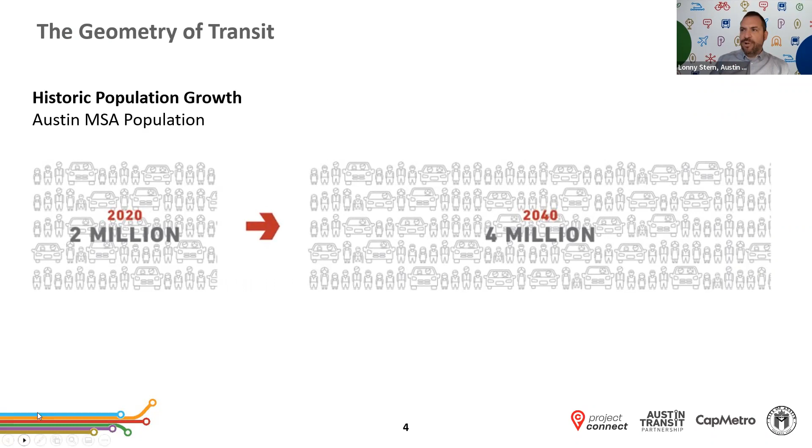First, none of this is a surprise, I'm sure, at this point, but the region is growing. We're doubling in size, and by 2040 there'll be twice as many of us. Unfortunately, the roads will not be twice as wide in 2040, so we need to figure out how to move more people through the same amount of space.

So what we're trying to do is encourage people to choose a bus, choose a bike, a train ride, a pickup ride, or to walk when they can. It's not an all or nothing thing, but if you're commuting to and from the office 5 days a week and 1 day a week is your transit day, that's a 20% reduction in your contribution to the traffic. Or if you're thinking, that's cool, but I don't have a bus, I don't have a train, I'm not going to ride my bike to work — even just carpooling is a reduction. If you carpool once a week, that's a 10% reduction in your contribution to the traffic. And certainly van pooling is another option as well.

So we look to partners like Movability to help people choose those choices. But at the same time, we still need to offer these opportunities so that you have those choices. And Project Connect is a piece of that.

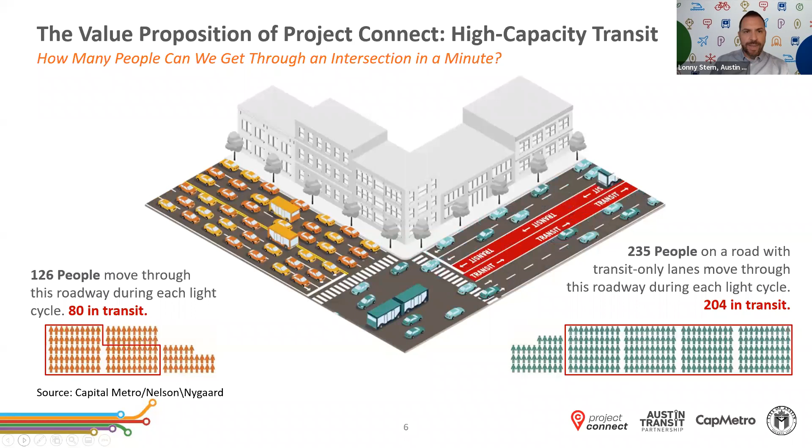Now, in order to do that, we worked on a plan called Project Connect, and I'll give you just a little bit of an overview of the players and the timeline and what that plan is like, and then we'll take a deeper dive into the services themselves.

So first, this builds off of the Austin Strategic Mobility Plan, also known as the ASMP, and the city approved this. I'm basically noticing that right now 3 out of 4 people drive to work alone, and that was in 2019. So I suspect that a few things have changed since the time that this survey was done.

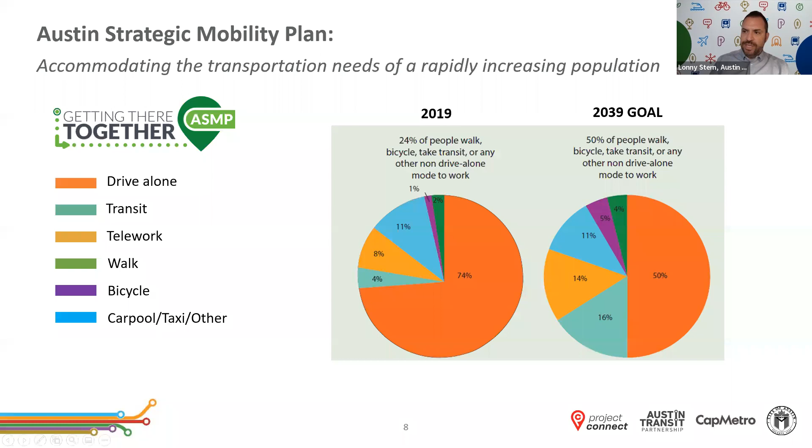We are trying to increase all of the alternative modes like transit, teleworking, walking, biking, or even taking a scooter, taxi, or carpooling. We are trying to make that a 50-50 mode split, so that half of people may still need to drive, but half of the people might be able to take some other mode to get to where they need to go. And to do that, part of it includes an investment in expanding and improving our transit system.

Voters in November of 2020 approved the initial investment for Project Connect. The initial investment are the solid lines on this map versus dotted lines as part of the future extension. So you can see things like, we want to offer Metro Rapid service on Parmer, but that's not part of this initial investment, versus we do plan to provide the new Expo Center line Metro Rapid during this initial investment, in addition to the Blue Line and the Orange Line. And even still, you can see there are future extensions of the Orange Line, and we'll go through that in more detail shortly.

In addition to what is getting a lot of attention, which is the rail lines, the light rail lines in particular, there's also the Green Line, a new commuter service we plan to offer, much like the Red Line is today. It's a freight line that could be running people on it as well.

We also plan to make improvements to our Metro Express service. We plan to add additional park and rides and transit centers. We are greatly expanding our pickup neighborhood circulator service. And again, I can go into more detail, especially in Q&A.

We need to build a new maintenance facility for the light rail system to operate. In addition, we'll be making improvements to things like our fare box, and also investing about $300 million in anti-displacement investments along the light rail corridors.

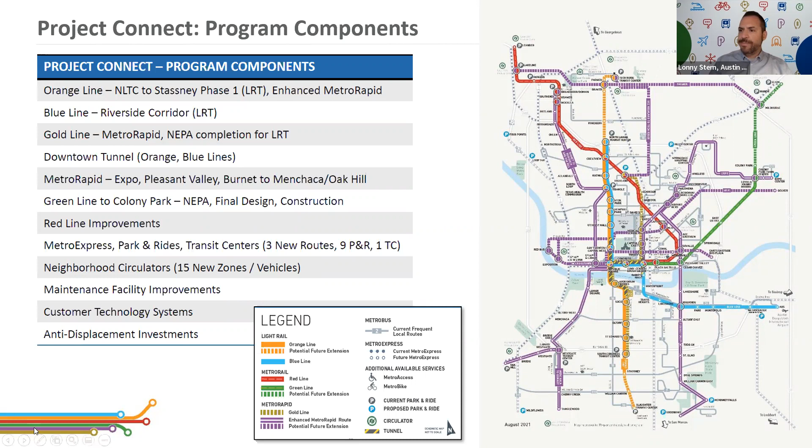And we'll be working with the community on some of the choices involved with that, like should we have a split station or a side-by-side station based on how much space it takes in the street? What do the plantings look like? How is art and the unique character of that neighborhood captured in the canopy? Is this canopy adequate for light, for rain, for information, for electrical charging, for buying a ticket?

And even, you think, oh yes, we need trees, we need shade, but it depends on what corridor you're in and what that tree might block. For example, on South Congress, you might have a really expensive sign on top of your business and feel differently than perhaps the general public about where trees are placed.

So a lot of the work we're doing is currently talking about the track and the station, but in the coming year, in 2023, we'll be talking a lot more about what the street life generally looks like and what the look and feel is of the system. So right now we're talking about track and stations, and in the future we'll be talking more about the actual built environment that goes with it.

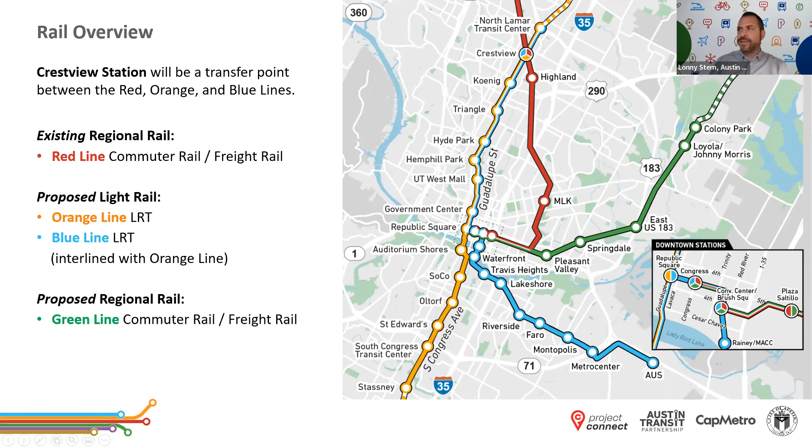In addition, there's the orange line, which in the initial investment will run from 183 down to Stassney. Future extensions would take it to Slaughter and up to Tech Ridge. This is kind of the main trunk line now, and for those who are 801 Metro Rapid riders, it's that same line.

In addition, we have our Metro Rapid service. Metro Rapid are those kind of better bus services where you can enter any door. They tend to have Wi-Fi, the buses are usually larger, and the stations have more real-time arrival info.

We're going to be transitioning to electric buses, so you're going to start seeing these midline chargers in some places around the city. In addition to the Metro Rapids we have today, which is the 801, which basically runs the orange line, there's the 803, and we're planning to make some improvements there. We'll talk about that in a sec.

But these dotted lines you see here, the crosstown, that's a future plan, but currently that's Route 4. We're running 15-minute service there, it just doesn't have the rapid treatment yet. And then over here, the MLK line, that's future service. Again, we have 15-minute service there, but that's Route 18 today.

This will be a new service, again in the future, connecting Tech Ridge to Highland and Parmer, as we talked about. But the ones happening now, the Expo Center line, starts at, you guessed it, the Expo Center with a new park and ride.

It'll go down Loyola up to LBJ High, and we'll very likely have a new park and ride arrangement with AISD at the Delco Center. So for those of you who drive down 183, this could be another opportunity to get on the system.

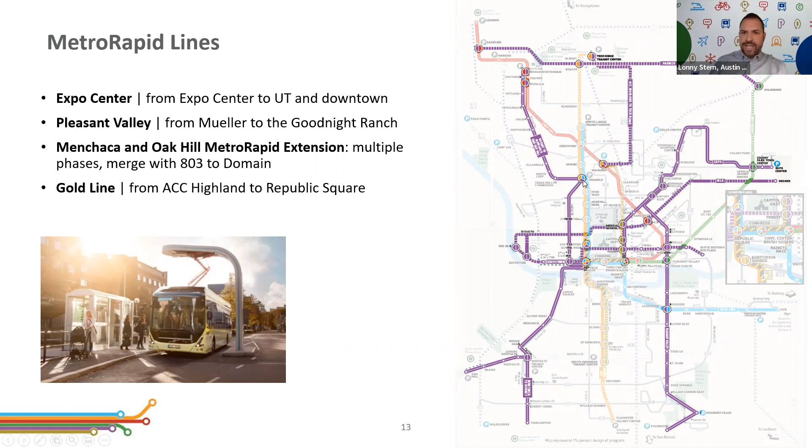When you come down to the triangle, you currently take the 803 down the transit mall, and then it goes out back to the library and down South Lamar. We're considering, when the orange and blue line are running here, that we may bring the 803 onto Lamar, so that you'll have direct service to points on Lamar Boulevard, including Pease Park and the Market District downtown. We're still considering that, and before anything is planned, you'll hear about a public meeting to discuss it further.

Next, I wanted to make sure people know that Project Connect is a program of projects being delivered across a three-party team. When we hosted the election, it was a City of Austin election because they have property taxing authority, and the election was not a bond election.

It was for a permanent property tax. This provides flexibility for the project, so it's not one-time funds, it's ongoing funding into the future. The city not only had that capacity, it's also overseeing right-of-way, permitting, and coordination with utilities, and is overseeing the anti-displacement investments.

We also work with Cap Metro, who operates our transit system. They weigh in on things like service changes, or where the buses might go if this service is put in place, or how you might adjust in the future, or which services would go to this park and ride, or whether a station is in the right location. We work with Cap Metro quite often on planning this project.

The Austin Transit Partnership is the agency that was created through the election. It's a local government corporation. The money raised through the election goes to the transit partnership to build out the projects, and once these projects are built, they become Cap Metro's to operate.

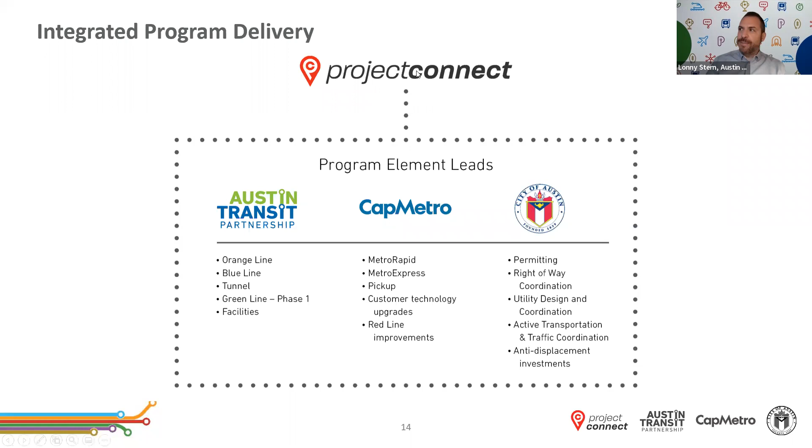It takes all three parties, plus at times TxDOT, the Federal Transit Administration, and CAMPO. There are so many players involved, but again, Project Connect is being delivered primarily across this three-party structure. We have an overall timeline. I think the main thing to take away is that the light rail projects are going to take about a decade.

We're in 2022, so we're about here on this schedule. We're just at final design and procurement, and it'll be about 2024 before we start construction on the line. We could do this faster, but we'd have to have more streets under construction at the same time, so we're planning to phase that construction.

The red line is a continuum—we should be finished with all the red line improvements by 2023, and that's when new service plans may be in place. For Metro Rapid, we're looking at 2023 and 2024 launch dates, and then a continuum for the remainder of those investments. But specifically, where are we right now with planning the light rail lines?

We're working with the Federal Transit Administration on considering our project. Last year we were working on our 15% designs; right now we're working on 30% designs and are hoping to get approval of our draft environmental impact statement. We'll be presenting that to the public and to the FTA this summer, very likely in August and September.

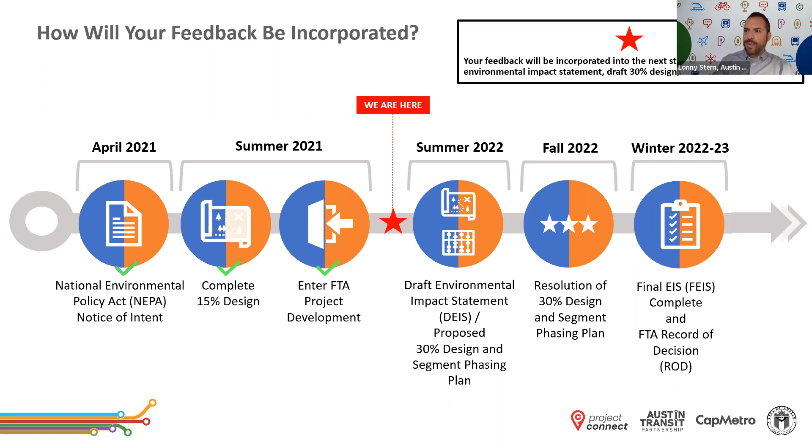Then we hope to hear back from the federal government this winter with a record of decision. If that happens, we'll know if they would like us to move forward on planning and designing this project, and also if they will be making an investment to the size we are planning. So, big year coming up ahead.

One thing I'd like to talk about is the discussion in the news about costs. It's true, costs have gone up, and that's because original cost estimates were done in 2018 and '19. While all of us are experiencing real estate price increases, so is this project. While all of us are seeing inflation, labor shortage, and cost of goods going up, so is this project.

In addition to that, the program scope is changing. As we host public meetings and people make requests, we try to incorporate that into the plan. When you do that, things like the tunnel length going from 1.5 miles to 4 miles become a significant driver of costs. So this coming summer, we're going to be talking more specifically about whether there are choices we can make to reduce the cost of the project.

It could be that we decide some things are nice to have versus need to have, or that we adjust the timeline, because we have money coming in through the election and will continue getting it over time. So it's possible some projects could be phased earlier versus later to help with that cash shortfall.

But the main takeaway is that the tax rates we set in that election will not increase. We are not going to return to voters until the project is completed for the initial investment. So please rest assured of that.

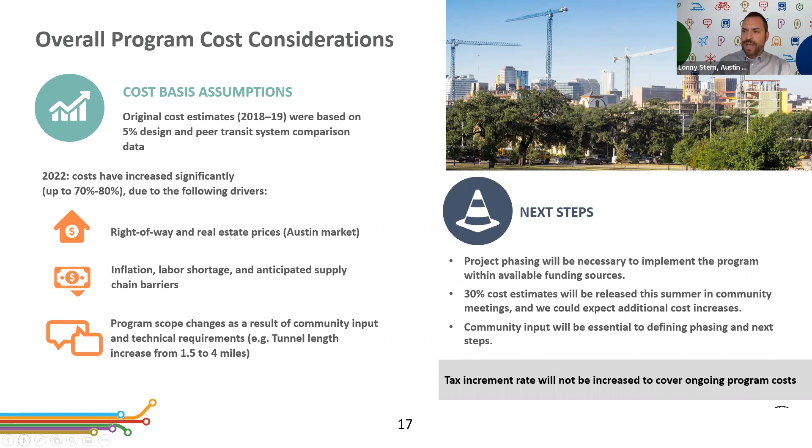We'll be discussing in more detail, and we can even talk about that in the Q&A, about how the project might change. So now just a quick overview of Metro Rapid and then each of these target areas. Again, Metro Rapid is a 10-minute service at peak, and we're moving to a zero emissions fleet, and also updating what these stations look like.

We'll have a larger as well as a smaller size station, because some of these will be in people's front yards versus main corridors. In addition, we've gotten feedback about additional sun screening and better coverage, so instead of that slanted roof, flat roofs, so you're better protected from sun and rain. Real-time arrival information will stay, but we're also incorporating Metro Bike into the design of these stations.

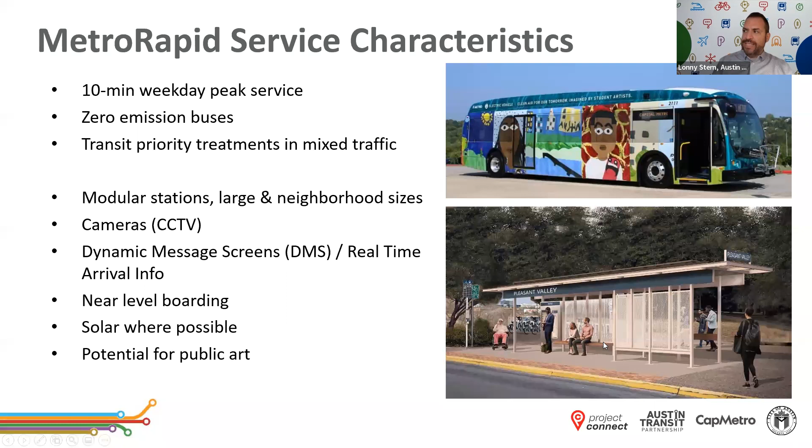In addition to the Expo line, this gives a little more detail about where those stops are. We've got a few others planned for this project, and again, I can make these slides available if you need to take a deeper dive on any of these.

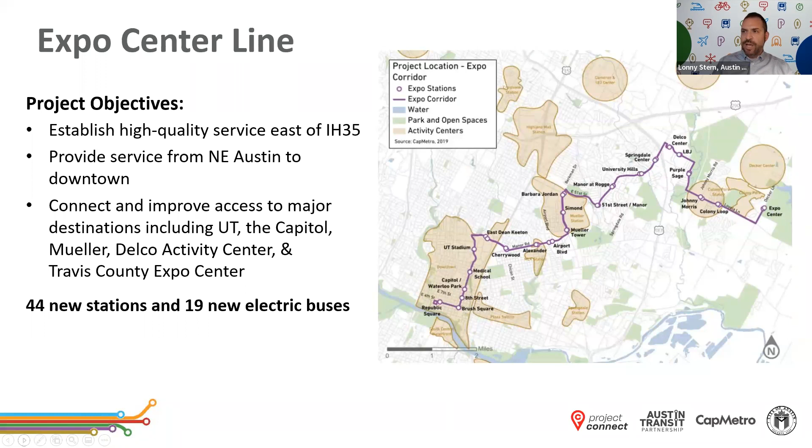So we talked about Expo Center and Pleasant Valley as well, making sure we hit on these primary destinations, including Mueller and the Springdale Shopping Center, ACC Eastview, Roy G. Guerrero Park, the general Pleasant Valley area, then down to Dove Springs, and eventually to Onion Creek, Easton Park, and Goodnight Ranch.

We had our groundbreaking, and we're planning service in mid-2023. And then there's the Gold Line - I know some people expressed interest in that. The Gold Line is being studied as a Metro Rapid, but in the future it may become a light rail line, so we're working with the feds to look at that too.

Currently we're planning it to run from Republic Square over to the Convention Center, then use the San Jac Trinity side of downtown to head through the university. This is on San Jacinto, comes up Dean Keaton, then turns up Red River to the Hancock Center. When it gets to 45th Street, it'll move over to Airport Boulevard and head up to Highland.

Now you can see there's a dotted line here. We originally were thinking about putting a park and ride at Highland, but finding a spot for that has become more difficult than we thought. So we're actually considering extending it to go up to Crestview Station and then North Lamar Transit Center, where we currently own that property and can develop it as a park and ride with parking facilities for Metro Rapid. This seems to be gaining traction and is very likely to begin.

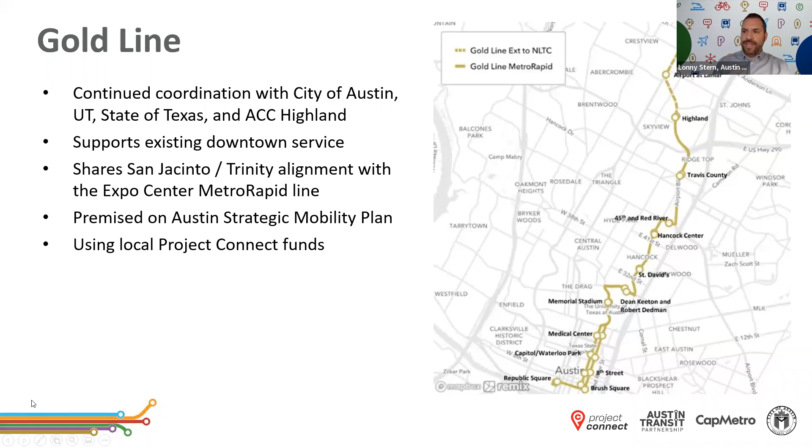In the future, in addition to going to Republic Square, it may actually head south and interline in the same way the blue line interlines with the orange line north - this one might interline or share tracks with the orange line heading south. But that isn't planned until this is upgraded to light rail, and that is not part of the initial investment. And then in addition, I showed this with Menchaca and Oak Hill.

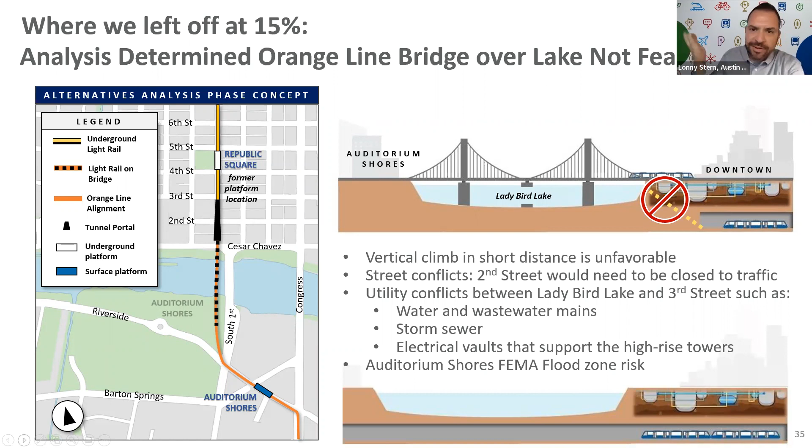The main reason was utility realignment and water/wastewater infrastructure in that area, which would make it very costly. There's also potential flood risk. So instead, it was decided we should stay under the river—not through it, just completely under it. The Lincoln Tunnel was built in the early 1900s; we have the technology now. So when you do that, you have both the short and the long tunnel option.

That meant Auditorium Shores would be an underground station. When you turn the corner, you might think of Congress as flat, but it's not—it's a hill. So you're trying to go up the hill and find a flat space for a station, because if you arrive with a wheelchair, it's a problem to get on a train if it's on too much of a slope. Also, the train itself is subject to gravity and might roll, so you want a flat spot for stopping it.

In addition, there's a creek that runs through here, not shown on this map—that's Blunn Creek. So you can't just pop up anytime you want; you need to get past that creek before you get into the climbing stage. Because of that, we thought this would be underground until just past where Music Lane is, coming out in the portal, then on the surface on South Congress, still going up a hill until we got to Lively Middle School.

That's where we could put the station on a flat enough surface, and then continue on the surface down to Oltorf—this is what that street looked like. We then presented the option of a long tunnel so we stay underground longer, putting the platform basically where the Metro Rapid is today. But that extends the tunnel at least this long, and you still have to come out of the ground. So you put the portal right around Live Oak, near where the old theater is, where that big art tile installation is, and continue on the surface.

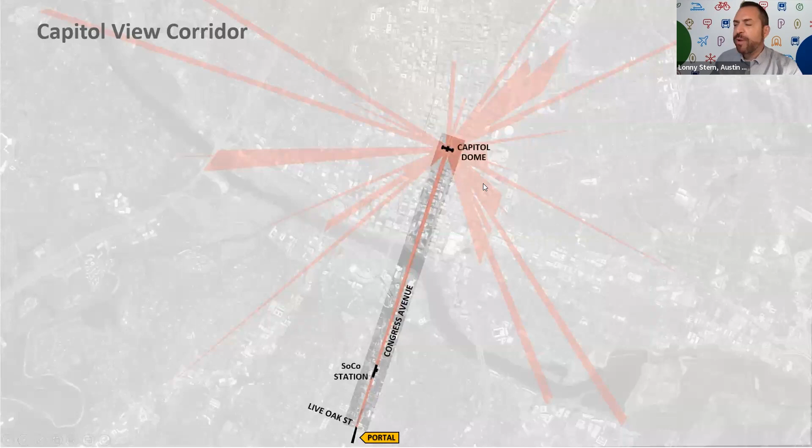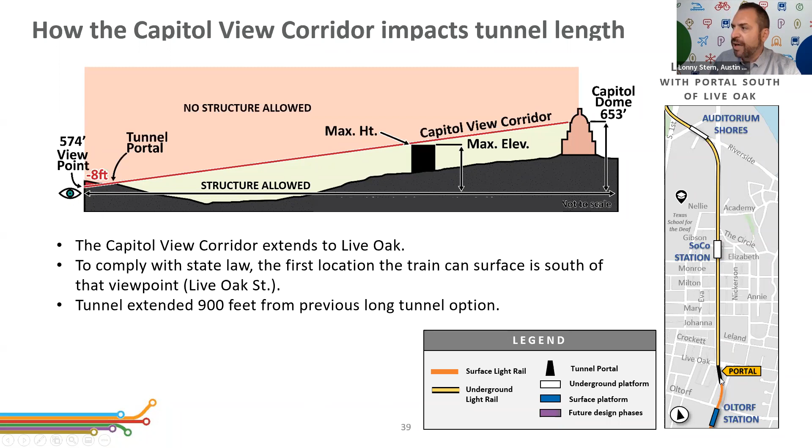So we were thinking Capitol View corridor, two-dimensional - these are the lines to stay out of the way of. But actually they are three-dimensional corridors. So while there are parts of South Congress where you can build, there are parts where the Capitol View corridor actually goes underground. That became an issue for us as we were thinking about where the portal would be. We had to push the portal past this section so we didn't break the Capitol View corridor on that hill. Because of that, instead of having the portal basically here, we're sliding it even further south, which also added some additional cost.

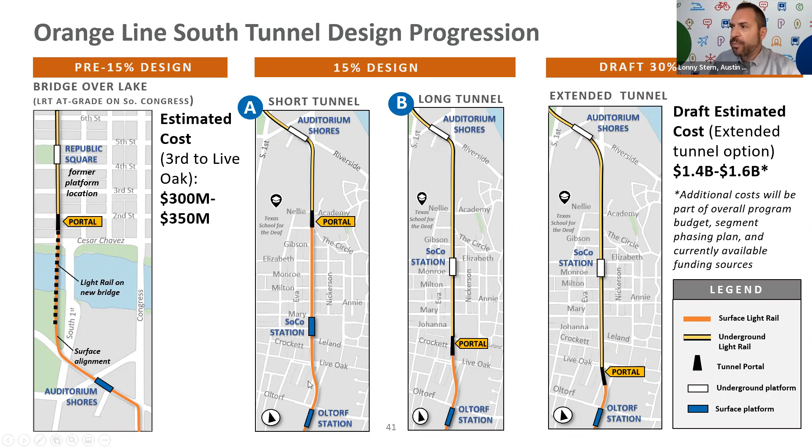So you can compare what we planned originally to the short tunnel versus the long tunnel versus the really long tunnel option. Because of that, there were significant cost increases here. So there's going to be a robust conversation about whether we shouldn't be doing this, and if it's possible to adjust the view corridor, or at the very least do this long tunnel versus the extended tunnel. So that's a big controversy there.

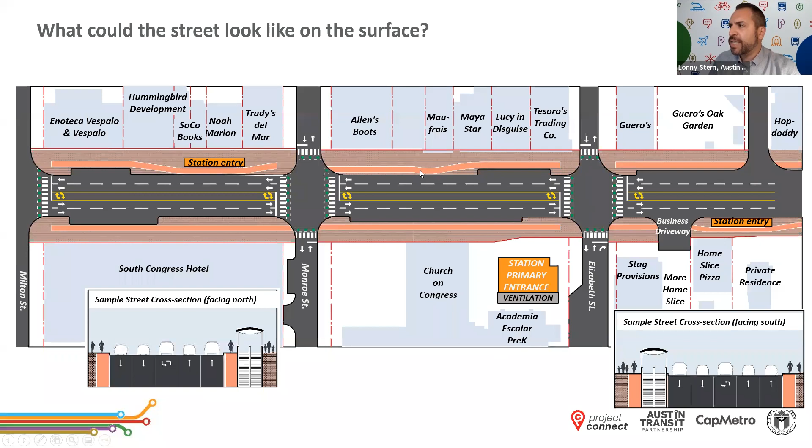And this is a side view of what the street might look like. These are examples of bikeways that are separated from the sidewalk.

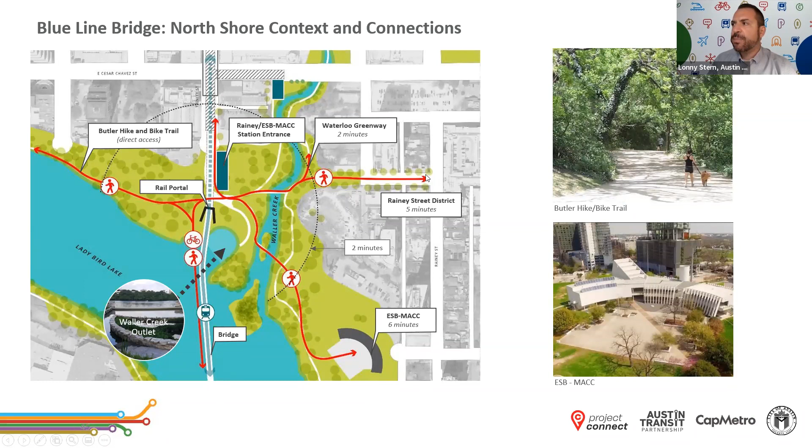All right, so that's SoCo. I'm going to move on to the Blue Line Bridge. The Blue Line Bridge is going to allow the Blue Line to connect from the South Shore to the North Shore and into downtown, so that those coming from the airport can get over to the Convention Center and then to Republic Square and points north. It also provides opportunities for people to get to the Emma Barrientos Mexican American Cultural Center, the Rainey Street District, and the wider destinations and housing along Waterloo Greenway. So currently there's a plan for a bridge with a portal - I'll show you more images of that - and a station entrance that brings it south of Cesar Chavez to provide better connections for these potential passengers.

Now, the first controversy is there's a boathouse there, and that's where that portal is going to be. So PARD is working on a new location for Waller Creek Boathouse, and they've pretty much settled on the old site of the Austin Hostel. That would bring it to the South Shore on the east side.

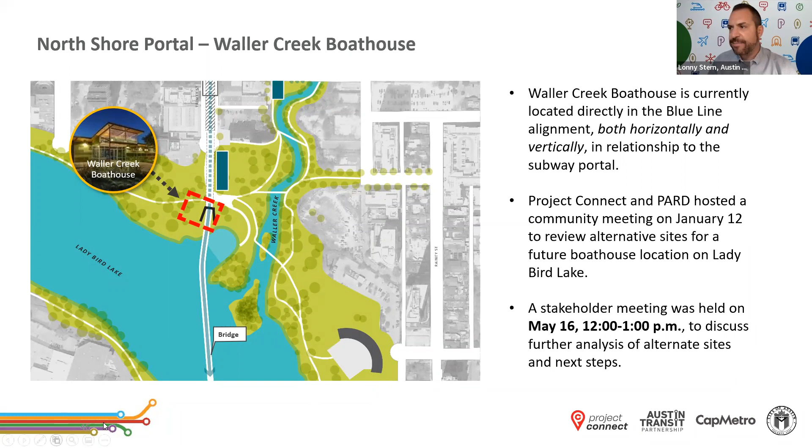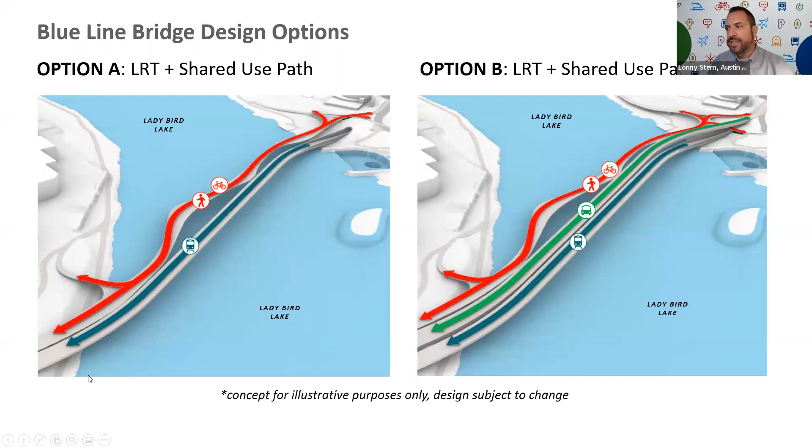Next, there's a discussion about whether this bridge should be for train only, or if we should also have bus service on this bridge. In both options we have bike, ped, and rail - you can see them side by side - but this one also adds a bus, and that adds some design challenges and costs. So this is kind of a rendering - again, these are not final designs, just images to help you understand what is being planned.

So this shows just the rail bridge, and there it is with the bus bridge. So option A, option B. Now we get to feel like we're at the eye doctor.

All right, so we continue forward. Here's an example of what it would look like as a pedestrian heading towards downtown with the train, and there it is with the bus bridge. So both options there.

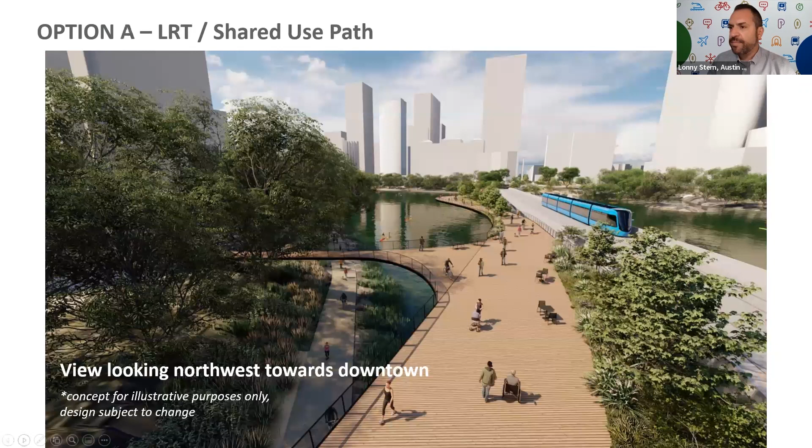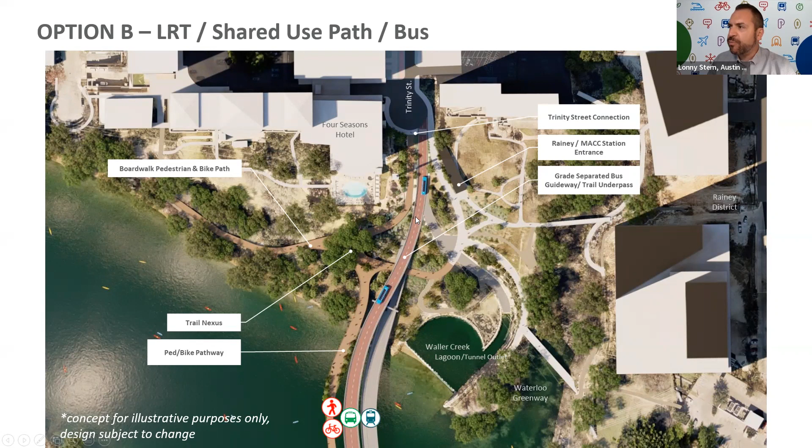And then I'm just showing what it looks like as a rendering as you're heading into the North Shore - you can see the pedestrian bridge and the rail bridge. This adds the bus bridge, and you'll notice the bus bridge, right when it gets to the shore, crosses over the rail bridge. So while the rail is going underground, the bus bridge is realigning itself to Trinity Street so we can get to the surface.

So again, A, B. And again, this is what it would look like if you were on the trail - here it is with train only, and then train with bus. So we add this pedestrian connection underneath the bus bridge but over the rail bridge in that option, versus here, you're going up and around, more similar to the way that you do today - up and around.

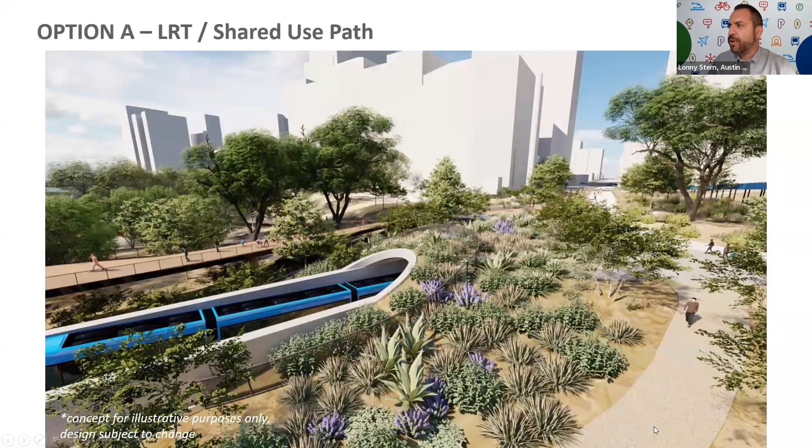Okay, and then this is looking south from Trinity. If you're by the Four Seasons, here it is with train only. Here it is with train and bus, and you can see that train station right there. I'm gonna slide over that real quickly.

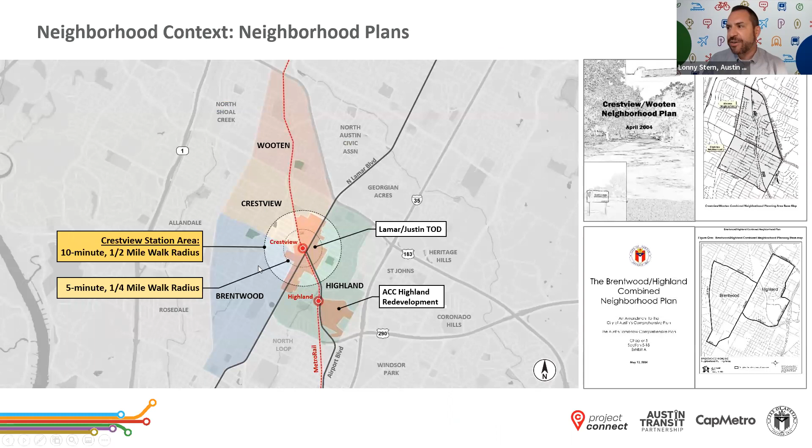Crestview Station is also another big knot that we're trying to work on, and there's a lot of things going on. In that meeting, we basically did a briefing, so I'll give you the Cliffs Notes. First, Crestview Station serves not just Crestview, but Wooten, Brentwood, Highland. It's a big connector feeder, and there's a lot of service in this area.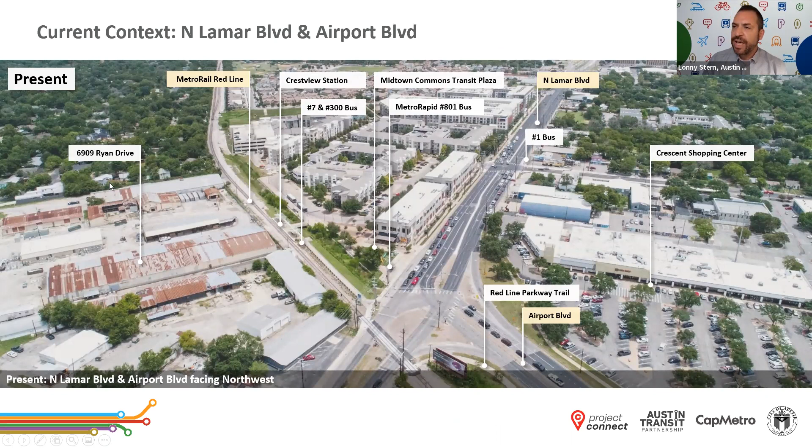This is more of a street view. You can see today there's several buses as well as the train connection, plus buses running this way and that way, and a lot of destinations, including a new development that will be built here and shopping that currently exists. For transit riders, the pink lines are coming every 15 minutes. You can see the 300, the 7, the 801 are all hubbing here at Crestview. In the future, the 350 may be updated to a 15-minute service too. And you're just a hop, skip, and a jump from the 337 and all of these green lines also providing service in the area.

On top of it, the gold line might be coming through here too. So Crestview is a very significant spot, probably more transit connectivity in that spot than in any other place other than downtown.

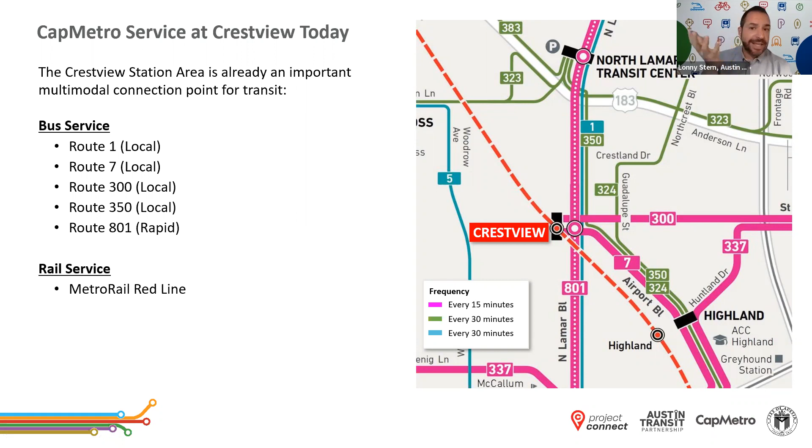We've already talked about the potential of extending the gold line, so I'll skip here and focus on this plan. Again, there's a lot going on, and that's what I'm going to cover real quickly.

First, there's the corridor office, which is trying to make improvements in this area to make it safer. These blue dots are showing all the vehicular crashes, and the green ones are pedestrian crashes in this area. For those who head to Black Star Co-op or the Crestview Station, you may know there's a bench over here that, no matter how many times it gets fixed, seems to get knocked down again. So there's a lot of crash activity in this area.

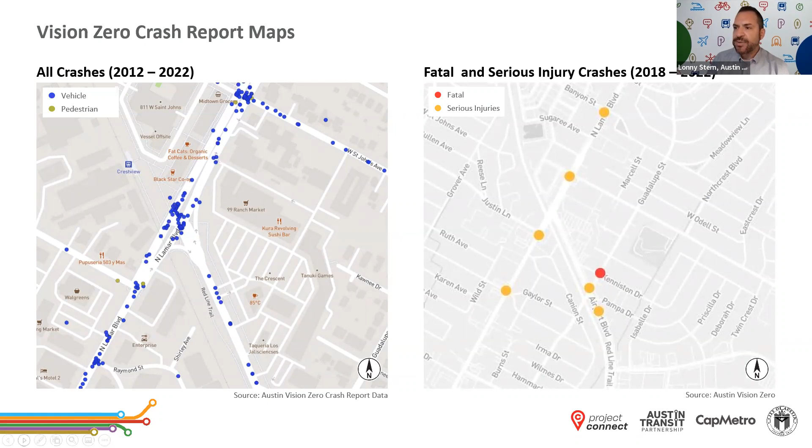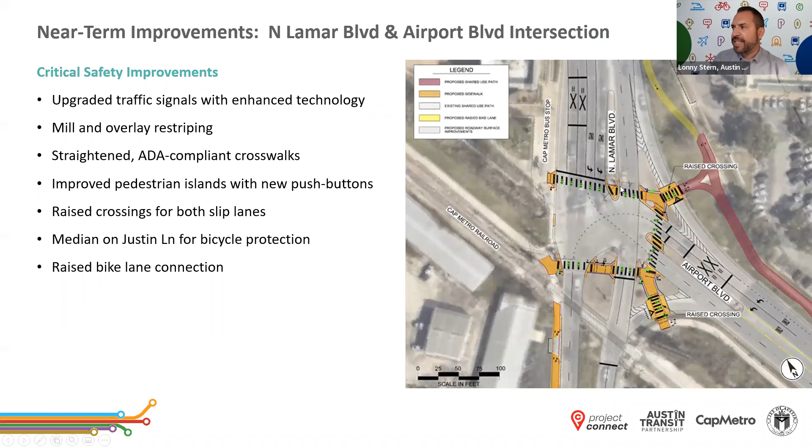So they are working to improve the street to help with that by raising the profile of the crossings in this area and completing the off-street pedestrian connection as well, so that people are less likely to be in this box should a car come barreling through.

In addition, there's the Red Line Parkway, a bicycle way that runs along the Red Line and is intended to continue going all the way out to Leander. At Airport Boulevard, it basically ends at Lamar. We're talking about extending it with the railway, or in the short term, connecting it to Justin Lane, either at Lamar, which personally I think is less comfortable, or up into the train station and then crossing on a bridge to connect to Justin Lane, since Justin Lane itself is a big bike boulevard.

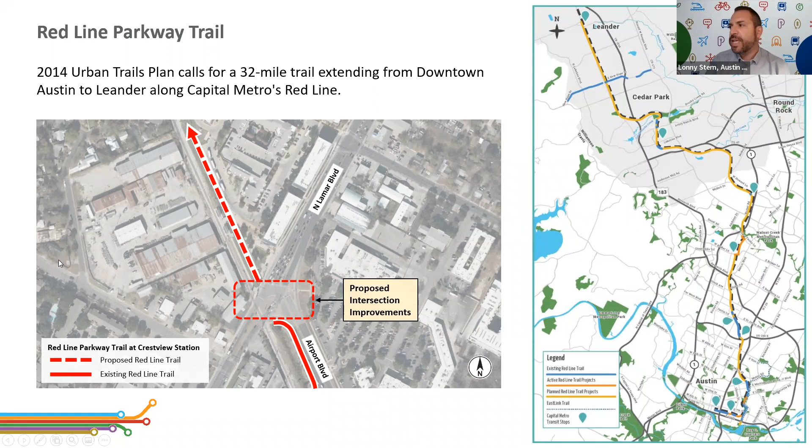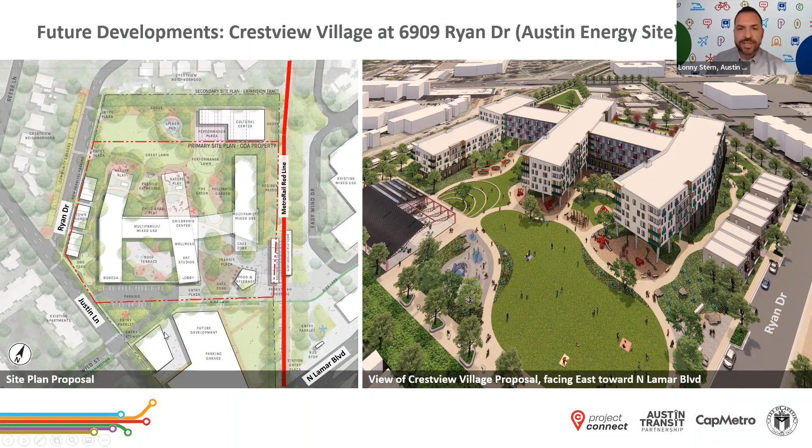In addition to this, that Austin Energy site that you see right here is planned to be a TOD development, and they are planning to have interaction with the station. So we're trying to coordinate with them in case this station platform moves, or in case we want to bring the bikeway through, or in fact, since they also own this property here, to coordinate that with our actual track along Lamar.

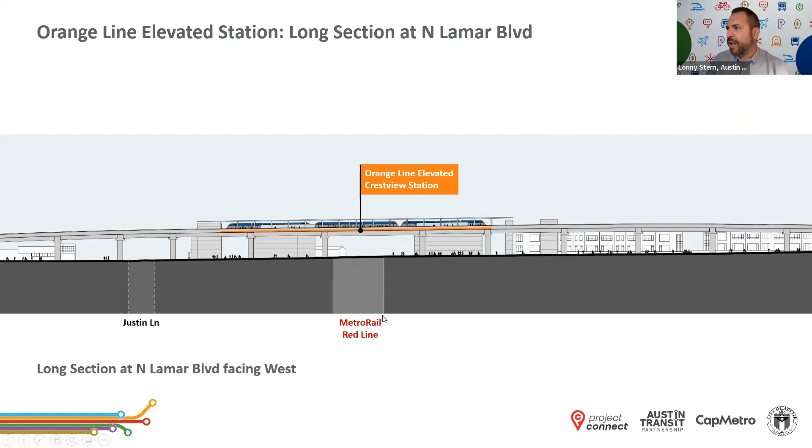Here's Midtown Commons. We're looking west, and there's an elevated rail line interacting in that area. Here's Justin Lane, and this is where the red line is, and then Lamar Boulevard is right next to it. So if that happens, we've got the platform here on the west side of that intersection.

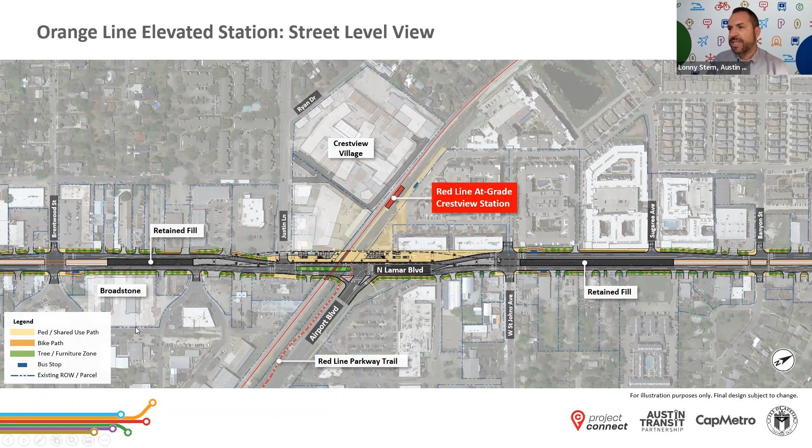The train goes up in the air with a retaining wall, and then the platform is here with elevators and stairs, which you can see more closely here.

I do see a question in the chat. No, there will not be a park and ride capacity at Crestview. The park and ride will be at North Lamar Transit Center, so people can connect there to the orange or the blue line. For those coming here through the red line, it'll be a simple transfer to the blue or orange line.

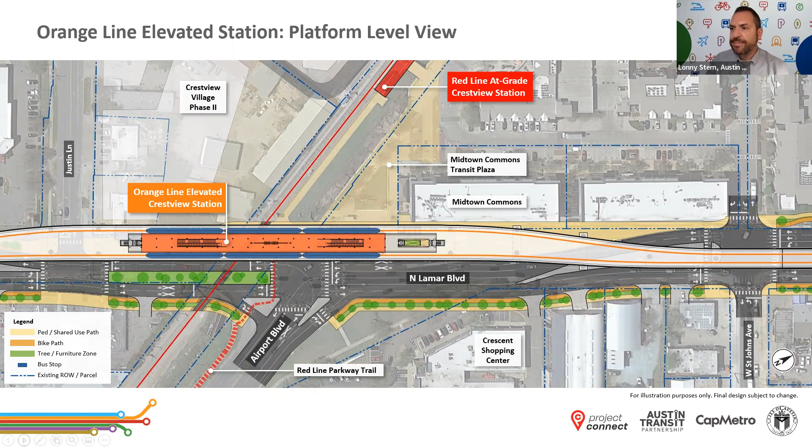But again, here we are with that elevated option, and that's what this could look like. If you're on North Lamar looking north, you might see this platform. Here's Midtown Commons, the train, and then Lamar Boulevard.

So that's option one. One more view: here's the orange line elevated station and how the street would interact with this area.

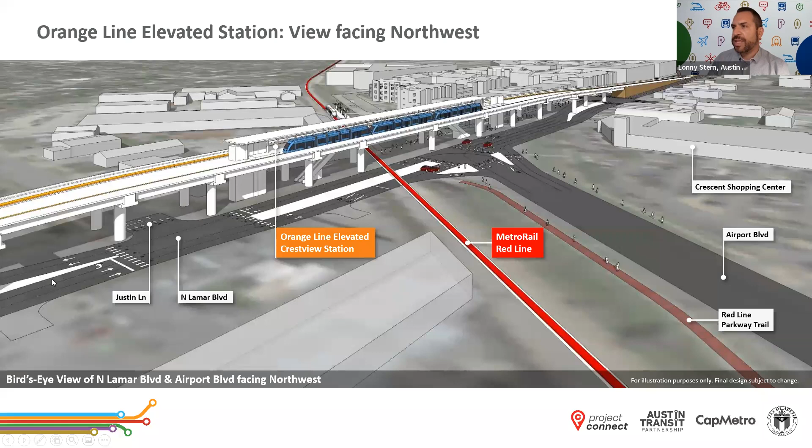Now we're currently considering what would happen if we put the red line below grade, so it would be in a trench. That is not part of Project Connect, but there is a team working with CAMPO to see if money would be available for that. If they built a trench, it would run just west of Guadalupe to just east of Morrow Street, so it wouldn't block those streets, but that would change what's happening at Lamar.

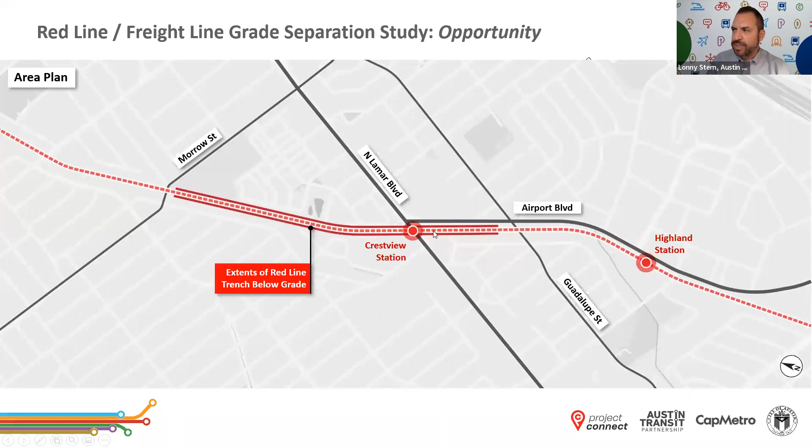If that were to happen, here's that red line underground. Here's Lamar heading north and south, and we'd be able to put the station directly under the street. So the street itself would be the cover for the station rather than having the stop where it currently is right here. That would adjust it.

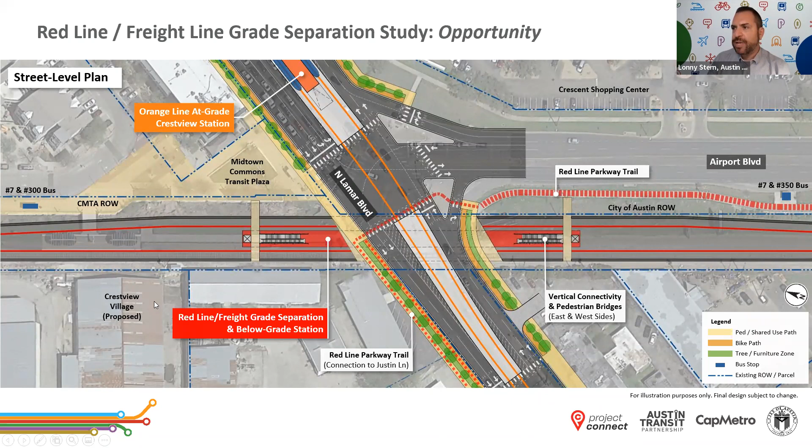And if that happens, we would very likely have a pedestrian bridge connection between Midtown Commons and the new Crestview Village. But that changes several things.

So first, again, we can do this. This would move the red line under the orange line. If so, then the orange line would stay on the street. It would shift slightly to the east and have a center platform on Lamar. That would adjust a little bit what these slip lanes look like, just to make some safety improvements and make this a wider space.

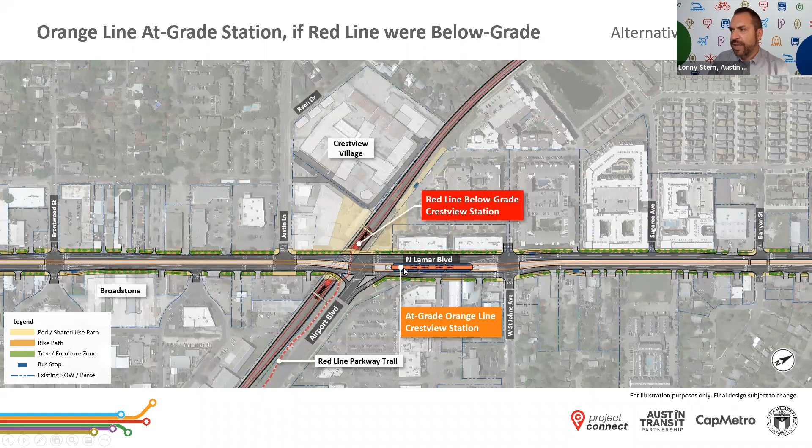But again, the red line train platform would be underground. You'd come up to the level and then cross over to get to the orange line. Here's a closer look at that.

This is what the street view would look like. You'd have the orange line in the center of the street with service running north and south on the side with a tree zone. One more view.

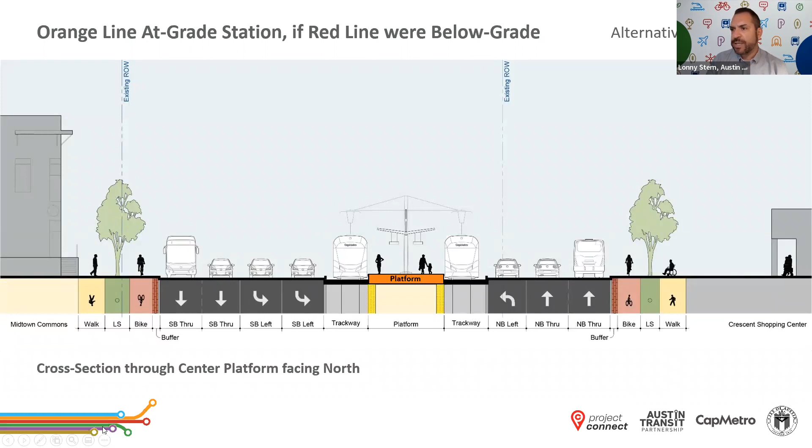You can see red line below grade. There's no bridge anymore in front of Midtown Commons; it's on the street, kind of like that. And this is the last view, so you can see what that trench might look like and the pedestrian crossings there.

Again, this is not finally designed. This is just where we're at the moment. So that's option A, option B.

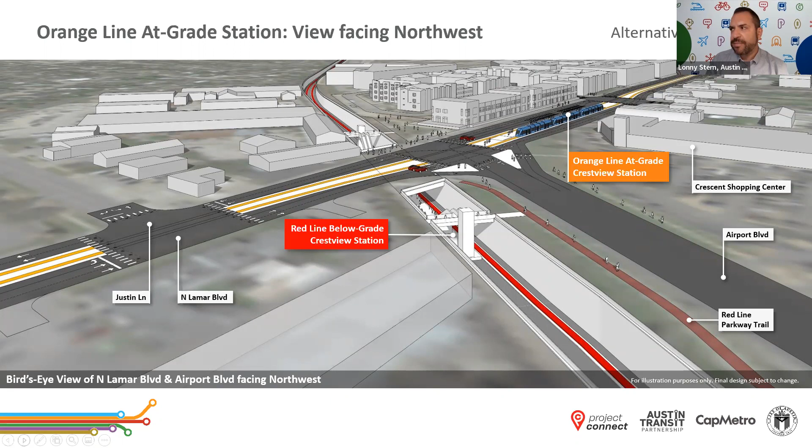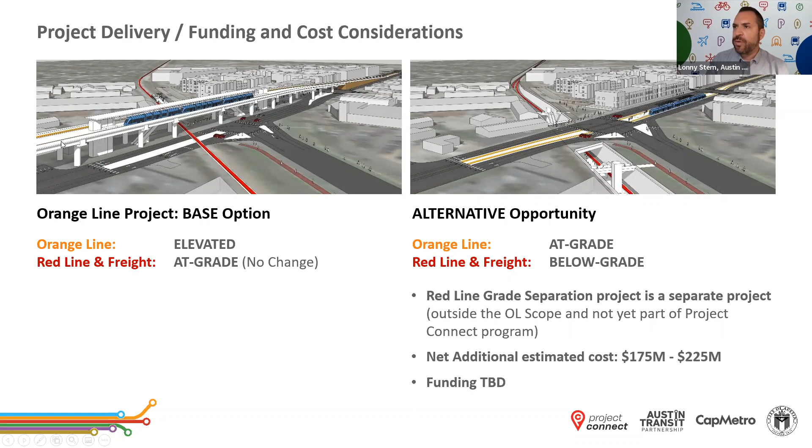All right, so again, there's a cost associated with this. If we do this trench, that's $175 to $225 million more. Again, we are seeking this funding from outside sources. If this funding comes through, then we will pursue a version like this. If not, we will continue with the default option, which is elevated orange.

All right, let's see. The last ones to cover, actually there are two more, are East Riverside and then the drag. East Riverside Station is here on the blue line at Pleasant Valley and Riverside.

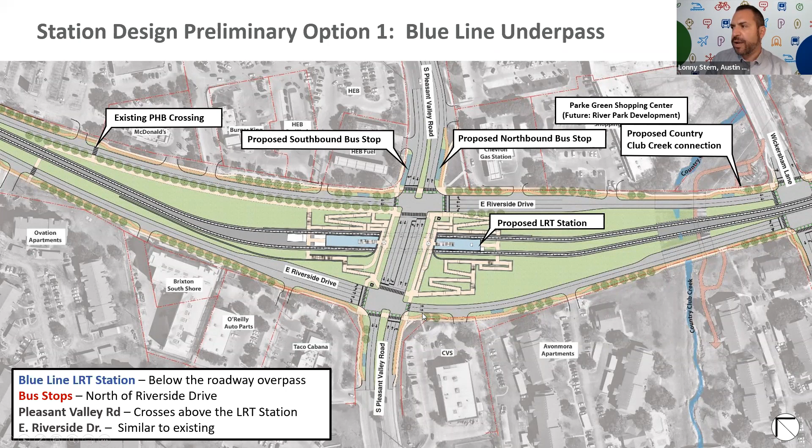We originally had a meeting about building a bridge over the train so that Pleasant Valley traffic went over it. This has pros and cons because, again, Pleasant Valley is a hill. So even though the train is here, the bus stops would have to be located over here, meaning you have to cross basically highways to get to the bus stops.

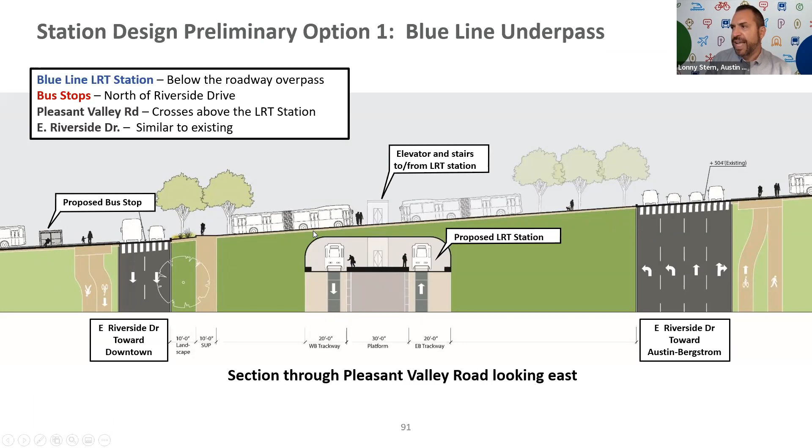You can see better, here's that stop, here's that hill. Even though you're going back and forth, you can't get on the bus here, you've got to go over here. So that was option one.

Option two had a roundabout that went around Pleasant Valley, so if you're heading north and south, you had to turn. That made it so the bus bays were right here next to the train. But if you're a pedestrian, you suddenly have to walk across like 10 lanes and some tracks to get across.

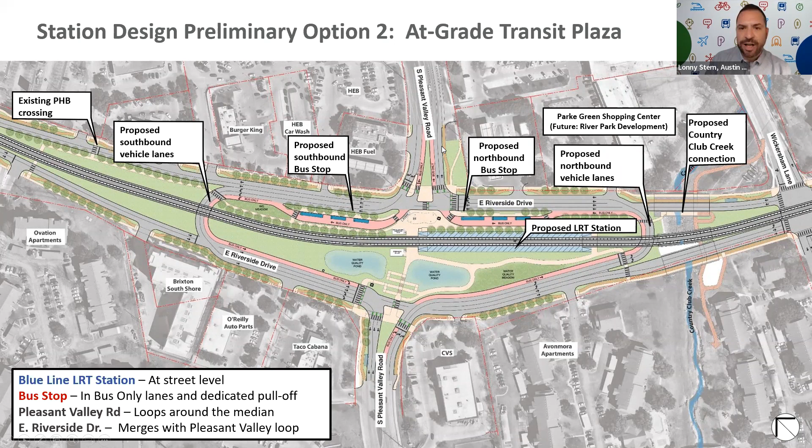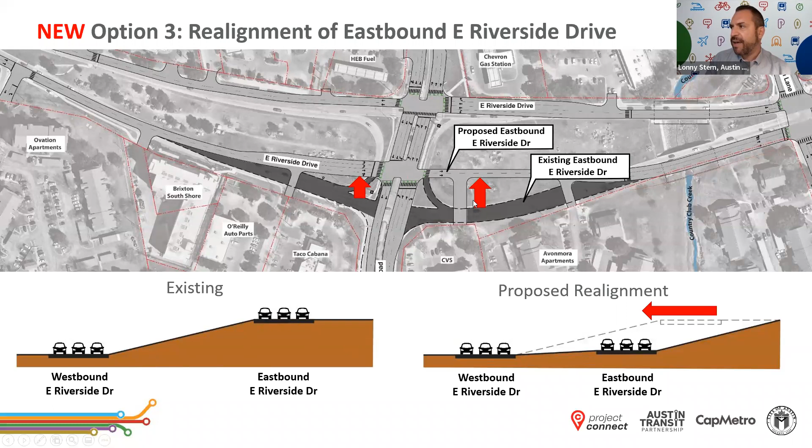That was not preferred by the public either. So again, we decided to take it back to everybody and come up with a new option based on that feedback. In doing so, we determined it makes more sense to relocate the eastbound travel lanes a little further north, so they come off the hill and down. We'll probably have to do some grading of this hill, but that way we can get the traffic surface on a flat structure instead of having this large hill to contend with. And when we do that, we'll have to regrade Pleasant Valley heading to this intersection because the hill won't be so high anymore, it'll be a little bit lower.

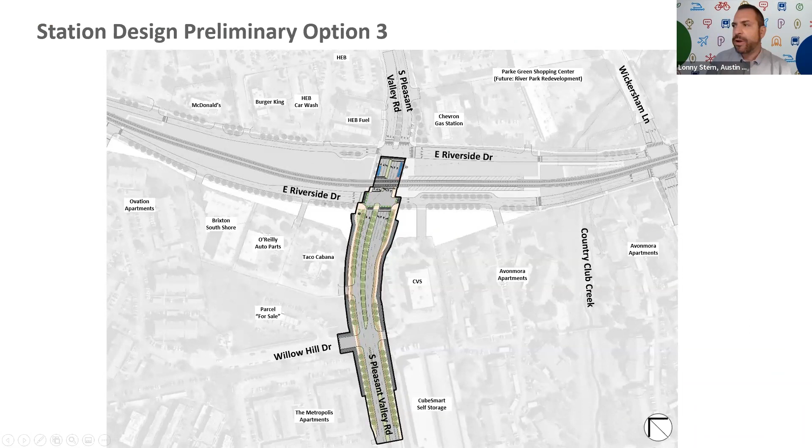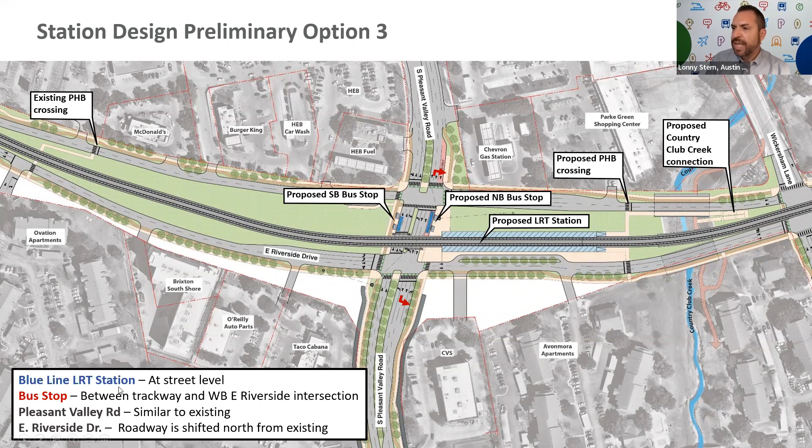The benefit of doing that is it allows us to hit the best of both worlds on the original proposal. We can keep the train at grade, we don't have to build a bridge, but we have room for kiss and ride. Because it's flat, we can put the bus bays right here on Pleasant Valley. This gave us additional space to design a public space in this area. So again, you'd have a bus pullout and Pleasant Valley Road going north-south, bus and rail connection in the same place. I'm gonna skip this just for time.

The original underpass was a $50 million increase. The least costly option is the roundabout, but there are safety issues. So this hybrid option is 20 million above the base plan, but is less than our most expensive option was in that earlier round.

I think I'm just gonna hit it again for those who weren't here earlier. Again, the 2020 election included a property tax rate for this project. That will not be increasing. There will be no additional tax rate request for this project. We will either make tough decisions about the project itself, or we will adjust the timeline for pieces of the project so that we stay within the funding that's available.

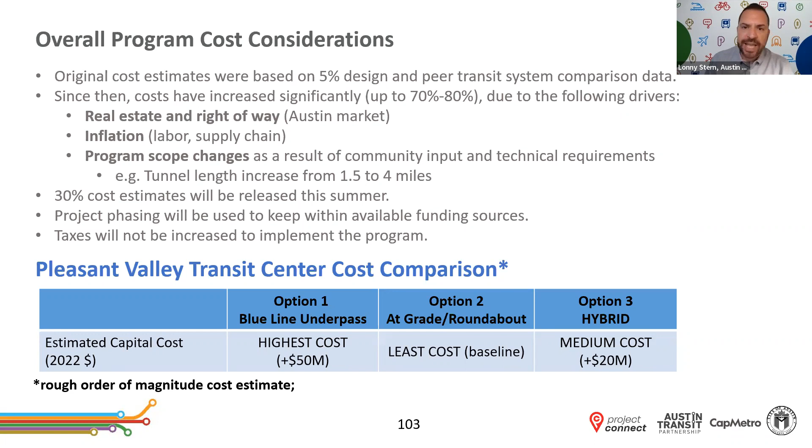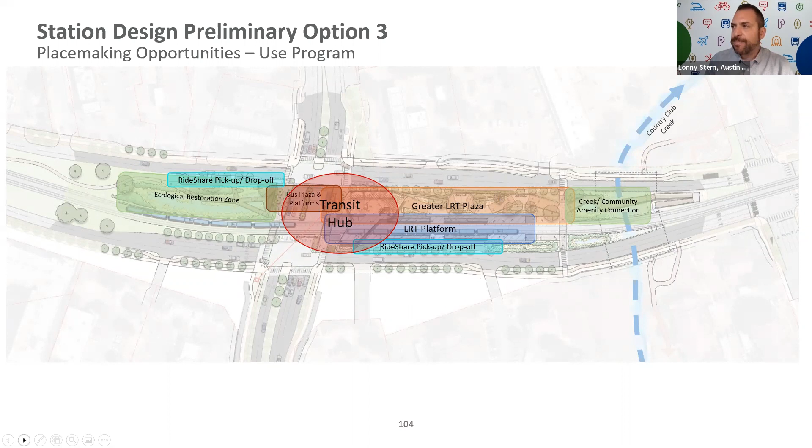So moving on, just to give you some sexy rendering highlights here. Again, this is Pleasant Valley. So we're looking at Pleasant Valley and Riverside, and this would be the station area. We designed it to coordinate with Country Club Creek, which will become more of a linear park destination. We also have to handle the significant water runoff that comes into this area and make it feel like a place. So this is some of the ideas we have for rain gardens and platform access in this area.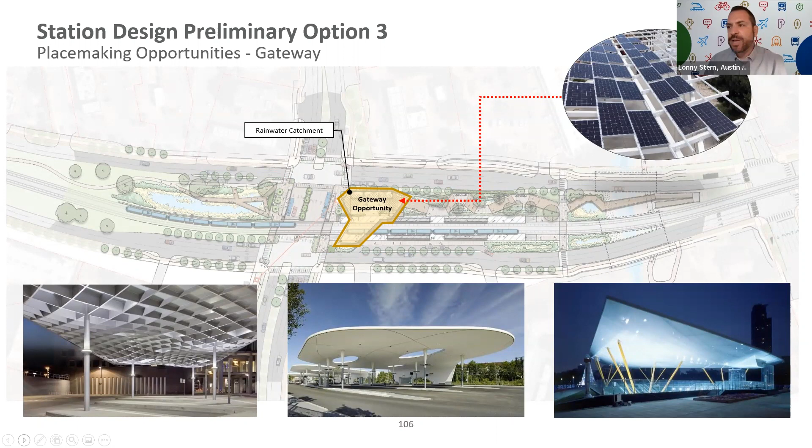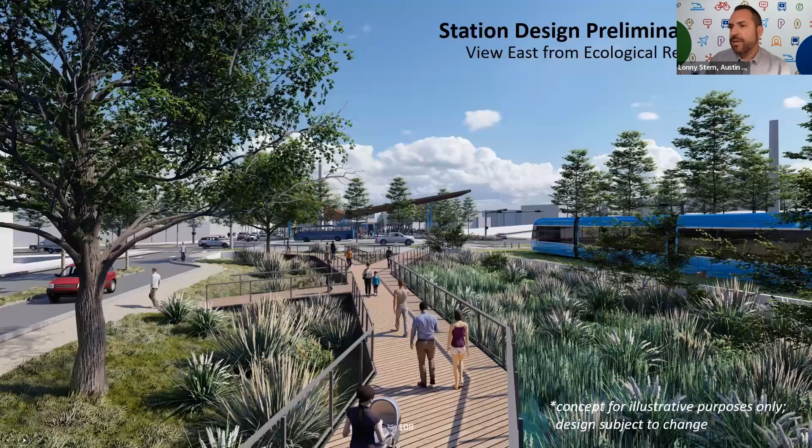So this is our operating plan for now and what we're planning to present to the federal government this fall. It's one more rendering because I love renderings. Again, we'll be working with the community to actually design this. This is just a concept at this point.

And then finally, I'm bringing up the Drag because the Drag workshop is coming up on the 14th. I certainly would encourage you to get involved because it's complicated. Again, the Drag is right here at UT West Mall. Blue line and orange line will be serving this area. The two stations impacted would be 24th Street and Hemphill Park, which is 29th Street.

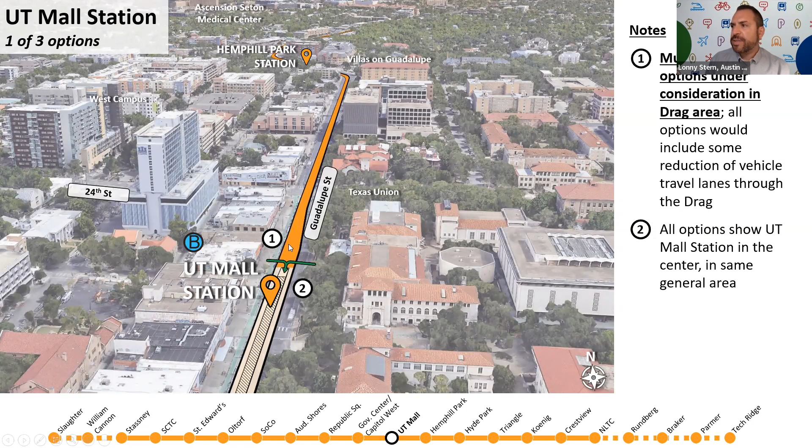From earlier in the 15% design round, just so we have a sense of place, there's a platform near UT West Mall, and then it goes around the corner for another platform at Hemphill Park Station.

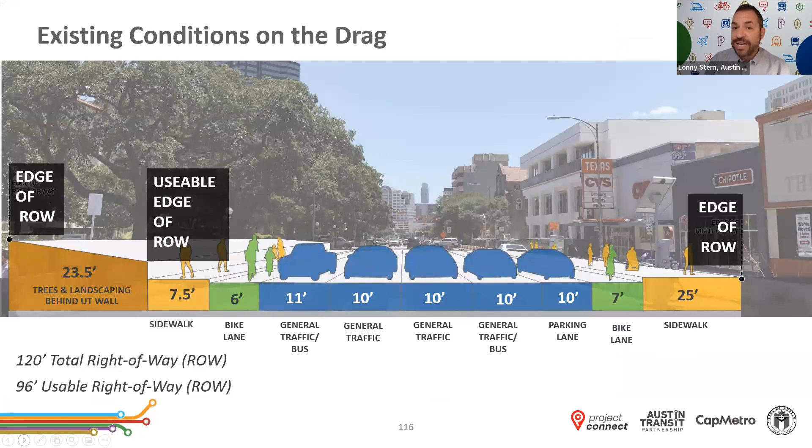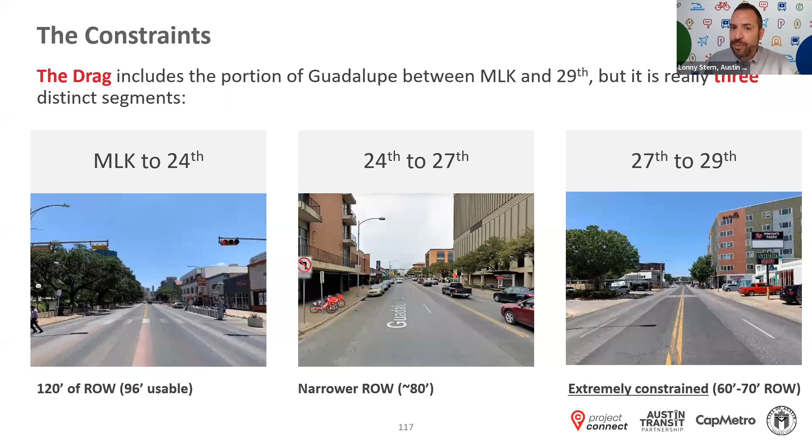Now, we're very constrained on right-of-way in this area, so there are some tough choices to be made. It actually gets tighter and tighter. You start wide at 120 feet, and then by the time you get over to Torchy's in this area, you're at 60 feet. So given that each road lane is like 11 feet, it's not very much to work with when you also want to get a train in there and a platform for people to use the station.

For those who are more block visual oriented, you can see how tight the right-of-way gets. So there are some tough choices already going on and some road realignment.

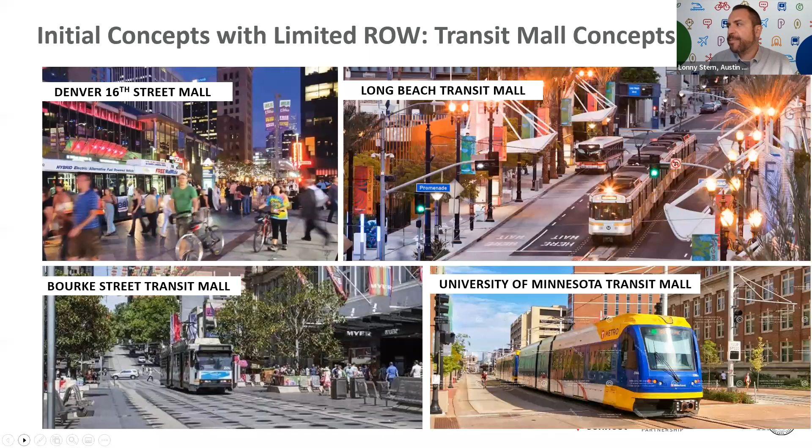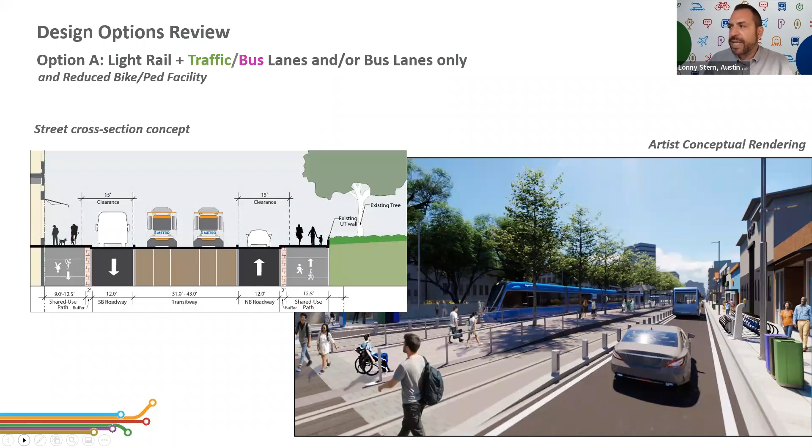We're imagining a transit mall in this area that varies from train only to bikes and buses, as well as train and bus only. We've really been open to community feedback on what will best fit the vision for this area. What we presented before were two options: one with a train in the middle and a bus lane that allowed cars, and another option with trains only, no cars, no buses, but with a bikeway.

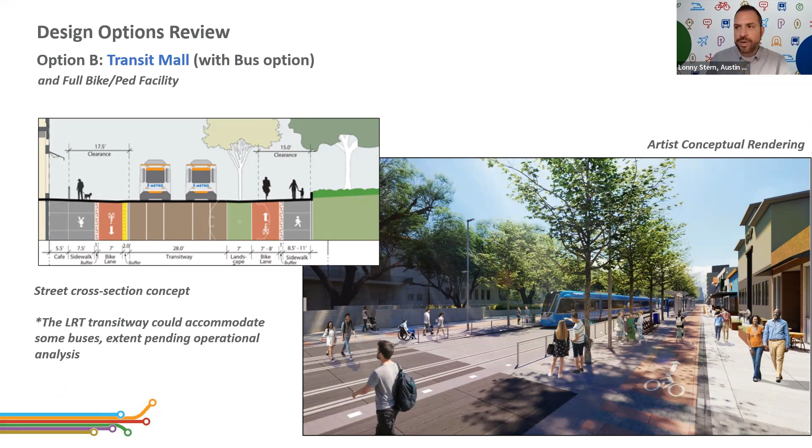I believe in this next meeting, just like Pleasant Valley, we're going to be taking community feedback to marry these two plans into a new option. So we really need feedback about what is potentially coming to the area.

Now, there were some trade-offs. When you add cars and buses, you lose the tree zone because you've got only limited right-of-way. In addition, if you choose cars and buses, you also have a combined bike and pedestrian environment versus separated facilities. So they were presented as a choice last time, and we'll see how it turns out in this next go around.

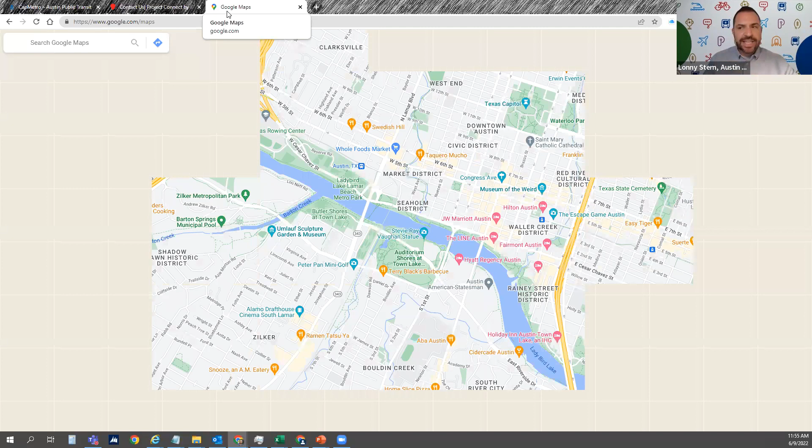So for Q&A: do we know when the groundbreaking on the Stastny Light Rail Station is and where exactly the station will be located? Well, that's two questions. I can show you on screen where it'll be located. As for when the groundbreaking is, I don't have an answer on that yet. We still have to decide on the phasing for this project, and depending on where it is in the schedule will determine when the groundbreaking is for that station.

For those interested in Stastny, if you head down here, there's a water crossing and TxDOT right-of-way. See where it says 275? That's where this becomes a highway. You think of it as South Congress, TxDOT thinks of it as a highway. So we're going to build a bridge here that allows us to get out of the floodplain and over to the new station. The station is very likely to be located in this general area, this kind of keyhole-shaped space with a park and ride facility and station.

I would assume it'd be somewhere in this area, partly for the connection to Mockingbird, because Ramble and Mockingbird provide deep connection into the neighborhood. So my guess is that the platform itself will be somewhere in this area with a larger park and ride facility around it. For those who missed it, we talked about the financing, and yes, anytime you take the train above grade or below grade, it gets more expensive.

So we're trying to avoid doing that. There's even some folks out there recommending that we don't tunnel under the river, that we use the bridge, and that would change a lot. So again, tough decisions coming on that regard.

There'll be traffic disruptions and traffic impacts. I think that's important for this group to know, that even if your property isn't directly impacted, like the tracks or station aren't on your property, the construction could be happening right in front of your business. In that case, there might be an impact to street traffic to your business, and we're aware of that.

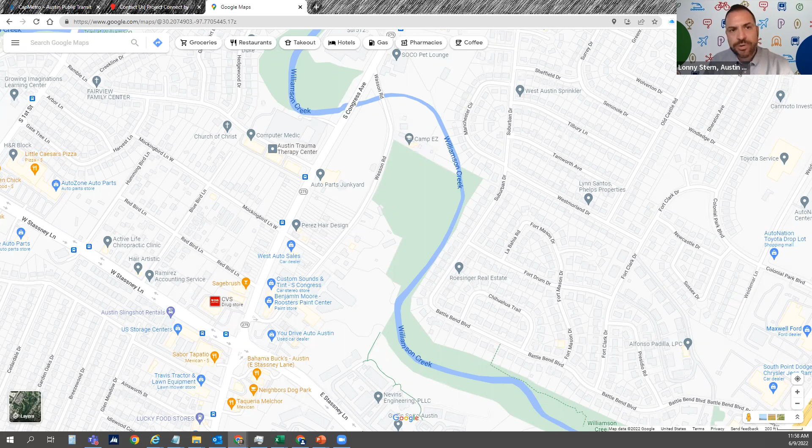Lonny, can I add something real quick about that? Of course, and I know ATP and Movability will be working together on this. Movability is also working with several other organizations, because in addition to Project Connect construction, there's upcoming I-35 construction. So we are going to be working hard on helping people understand their options.

It will be even more important to reduce single occupancy vehicle traffic as our roadways are disrupted and changed during this process. So please follow Movability, and we will get the word out as this timeline rolls forward on how to help, especially if you're looking at getting your employees around. We'll be working with businesses on a variety of ways to support them during construction.

The good thing is, even though the timeline for construction is 5 years, no section will be under construction for that length of time. Most of it will be 6 months or less, some of it 1 year or less. So we're going to want to talk to you about the fiscal impact, but also things we can do, such as beautification, promotion, alternative commuting for your employees, the parking behavior of the construction crew, things of that nature.

And again, if you don't hear it from Movability, you might hear it from the chamber or from some other news source, but be on the lookout for that. Any other questions? I know we covered so much in a very short time, but I hope you'll be engaged and give us your feedback.